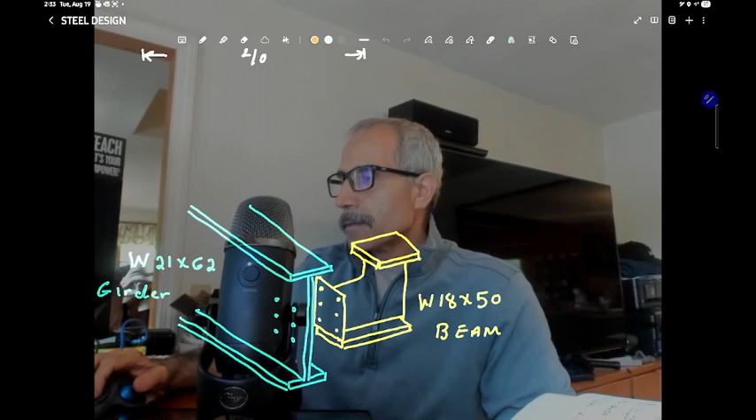In this lecture, we're going to design a connection between beam and girder. There are several different types of connections between beam and girder. We talked about double angle before. This time we're going to talk about end plate connection. An end plate connection is basically a plate welded to the end of the beam, and then you connect them to the girder.

Let me show you what I have. I've got some material I want to show you.

Let's consider a beam to a girder connection. When we connect a beam to a girder, we want the flange of the beam to align with the flange of the girder at the same elevation. This alignment creates a gap between the web of the beam and the web of the girder, and you can see the gap right there.

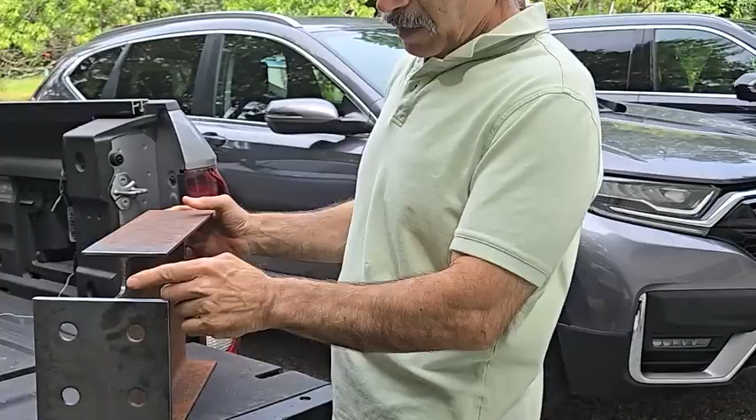To make the connection fit properly, the steel beam should be modified with cuts, typically at the flange and the web. This modification is usually called a coped beam. What I was talking about, this is a coped beam, and it has been coped out right here, notched out right there. This is basically the width of half of the flange of the girder.

So when you bring this in, your end plate right here will touch into the web of the girder. This is the end plate, basically a plate welded to the end of the beam.

When we look at this, I want to show you the end plate first. Let me show you that here. Look at the welding right there. The plate is welded to both sides of the web, and then also welded to both the bottom and top of the flange.

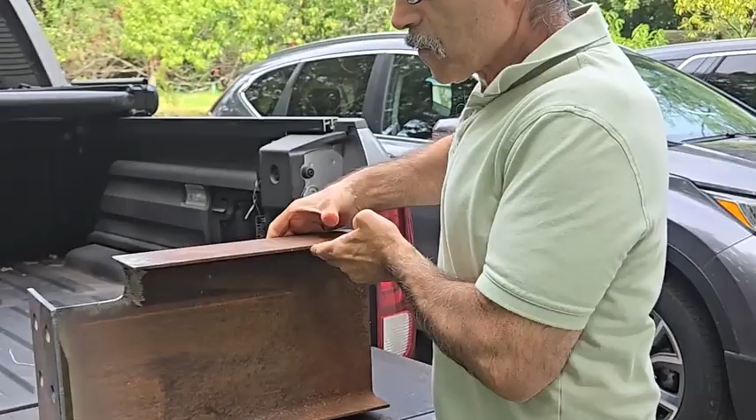When we design this and connect it to a girder, there are 4 or 5 different possible failure modes we have to examine.

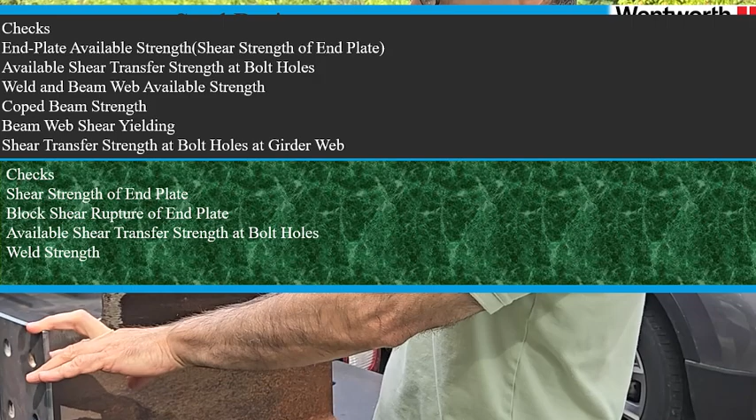Look up on the board and you can see one is to check the available shear in the plate itself, and see if the plate with all the holes in it will hold up under block shear rupture. Then we check the bolt connection, if the bolts are strong enough to connect the shear weight, and then we check the shear capacity of the web itself in this condition.

Then, because we took a notch out of the beam, we've weakened it, so we double check the beam for that weight with the coped beam. Then we check the girder - normally it's bigger and stronger so we don't have to check it as much, but we can also check the girder web and the shear connection between both of them.

Okay, we're going to go ahead and work on this example. This example says: design the available strength of a shear end plate connection to connect a W18 by 50 beam to a W21 by 62 girder web. So this is the drawing I did - we have this W18 by 50 right here connecting to this girder, and it's kind of coped.

Based on these loads, both the girder and the beam have already been designed, so we don't have to worry about that. But looking at the plan view of one of the bays, these green lines are the girder, and your beam is about 40 feet long, with about 10 feet spacing between beams.

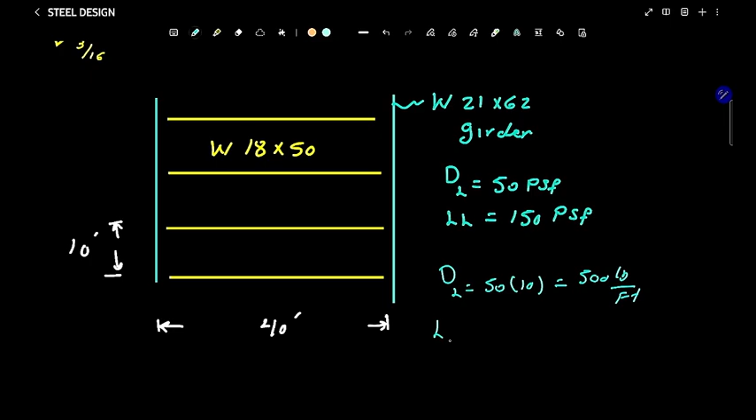First we're going to figure out the dead load and live load per foot. The tributary width is about 10 feet. Therefore, our dead load is 50 times 10, which makes it 500 pound per foot. And the live load is 150 times 10, which gives me 1,500 pound per foot.

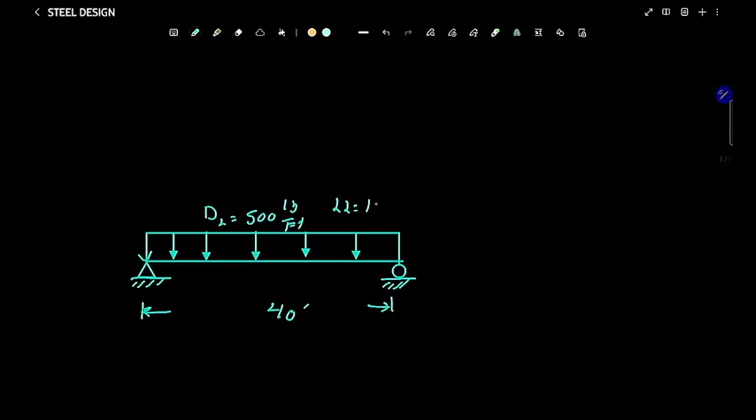So I'm going to come back down here. Dead load is 500 pound per foot, and live load is 1,500 pound per foot. So what I need is the reaction, really I want to know what the shear is.

That's going to be my shear. We do this basically for a shear connection, so this reaction is WL divided by 2. You remember that from kindergarten.

For dead load, it's going to be 500 times 40 divided by 2, and that will give me 10 kips dead load for shear. And live load is the same thing, 1,500 times 40 divided by 2, that's going to be about 30 kips.

So your dead load is going to be 10 kips, and your live load is going to be 30 kips for the shear right here.

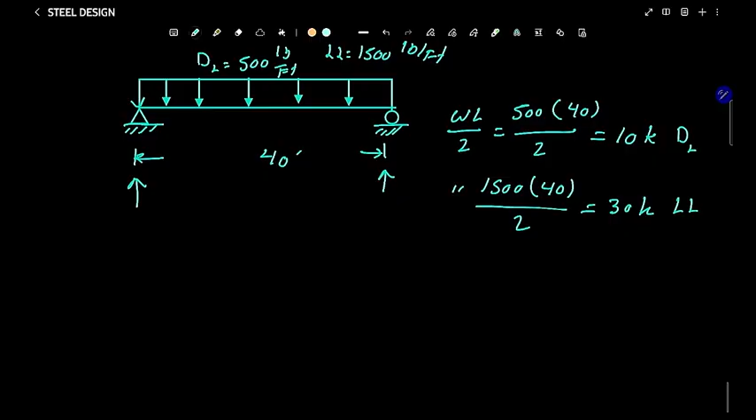To continue with this problem, we're going to use 70 KSI weld and a 50 KSI plate. If you go to the manual, 16th edition, table 2-4, 2-5, we can say Fy is equal 50 for all 3 pieces, and Fu is equal 65 KSI. From table 1-1, the thickness of the beam web is 0.355, and the girder is a little bit bigger, 0.4 inches. Then we're going to go to AISC chapter 2.

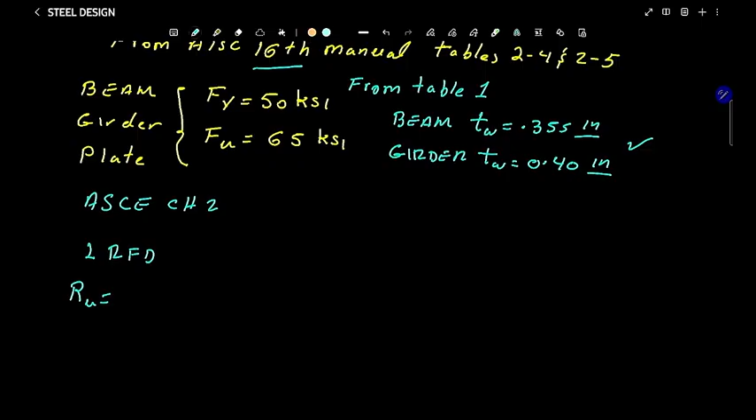You remember that from structural analysis. We're basically going to do a load combination, and for load resistance factor design, our RU is equal 1.2 times 10, that was the dead load, plus 1.6 times the live load, which came out to be 30 kips. And that gave me about 60 kip.

Now if I do the allowable stress design, which I kind of like, ASD, that's basically going to add both of them. We're going to call it RA is equal 10 plus 30, which is equal 40 kips.

If you're a young designer, new at this stuff, I really recommend watching some of my videos about allowable stress design versus load resistance factor design. They're two different design methods. One is the older generation, this one is the new one. Over the years they modified things based on probability, and this used to be the older way when the structure was built very strong and oversized. There's a different theory about it, but I'm not going to get into it.

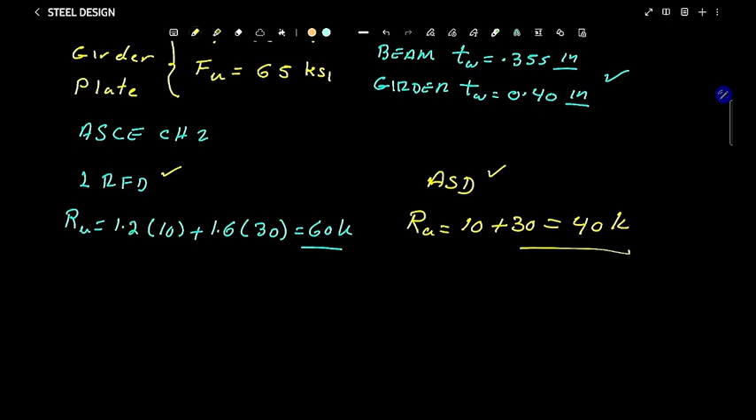So anyway, the first thing we're going to go ahead and do is check the end plate available strength. Let's talk about end plate.

We're going to cover a whole couple of lectures on this. Let me bring this up on a screen a little bit. There's a variety of different formats of end plate. You can see these are basically made for a moment connection, but our end plate is for a shear connection. But never mind.

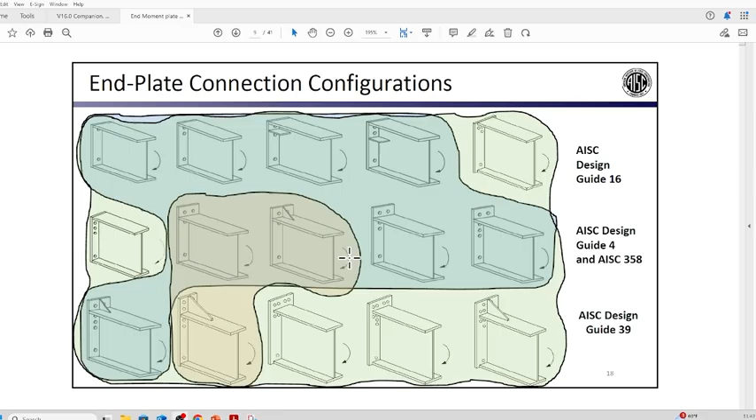One thing I want to tell you is there's a whole chapter, a whole book on this. Let me bring it over here, you can see that now. If you go onto the AISC website under education, they've got a lot of good stuff. Once you become a member, you can download a lot of nice material for free, and I highly recommend it. Design Guide 39, End Plate Moment Connection. There's a whole book on this, and it's really very good reading and useful.

Anyway, let's get back to our problem. We're going to go ahead and figure out the end plate available strength using table 10.4a. Let me show you this, see if I can do this. AISC Manual 16th edition, and then we're going to come into the table.

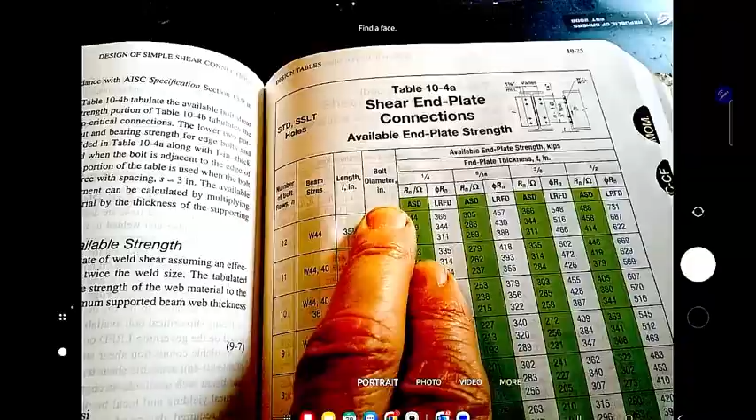If you look at this table, table 10.4a, it's for shear end plate connection, and it's available end plate strength. Just look at the column heading. You got number of bolts in a row, beam size, length, bolt diameter, and then we have the end plate thickness. Our plate is 1/4 inch.

Our bolt diameter is 3/4 inch, and we had 3 rows. So I'm going to come in down here, 3. That's way down here, 3, and our beam was W18, if you remember. And then we have 3/4 inch bolt.

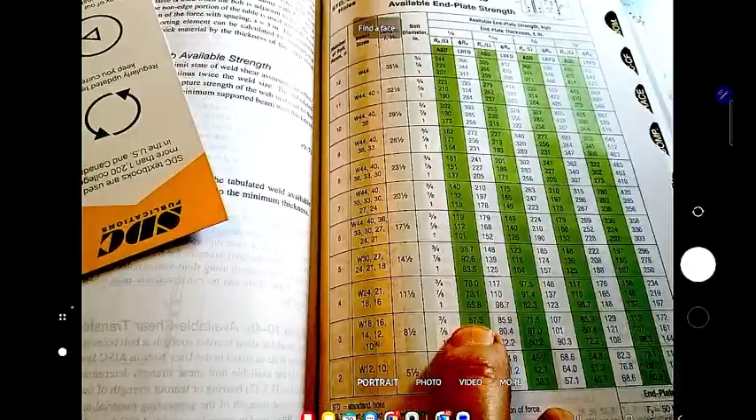And then when we look at these two headings, let's go back up there. One is the ASD, for 1/4 inch is this first one, and the other one is the load resistance factor. Phi times Rn is 85.9. Rn divided by omega is 57.3. So I'm going to transfer those back in my writing. Okay, that's where they come from.

Okay, so we basically said phi times Rn is 85.9, and when we did the load calculation, it became 60 kip, the R right here, and then for allowable stress became 40, so 57.3 over 40. Both design methods came out okay, so the end plate available strength checks out okay.

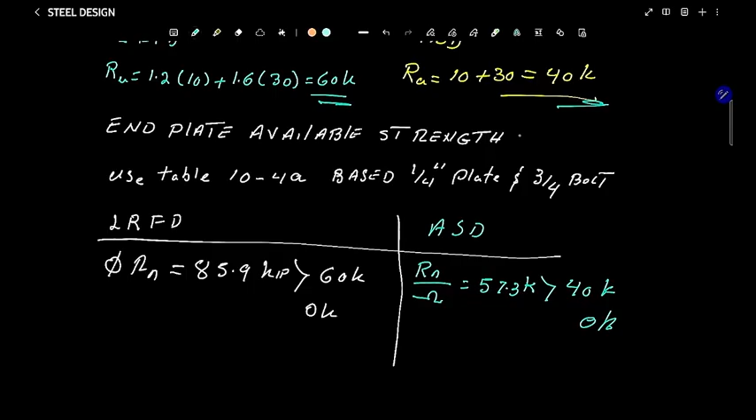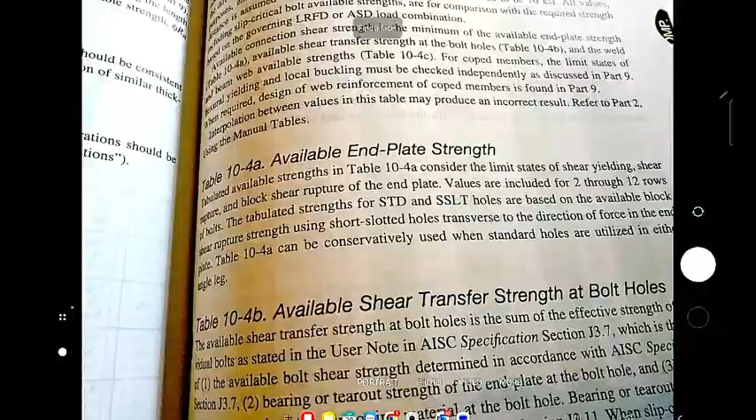Well, we just figured it out from table 10.4a. Make sure you go a couple pages before table 4a and read this section on page 10-23, and come down and read right here, table 10.4a, available end plate strength. It says, read that yourself, and there's a lot of good things in there.

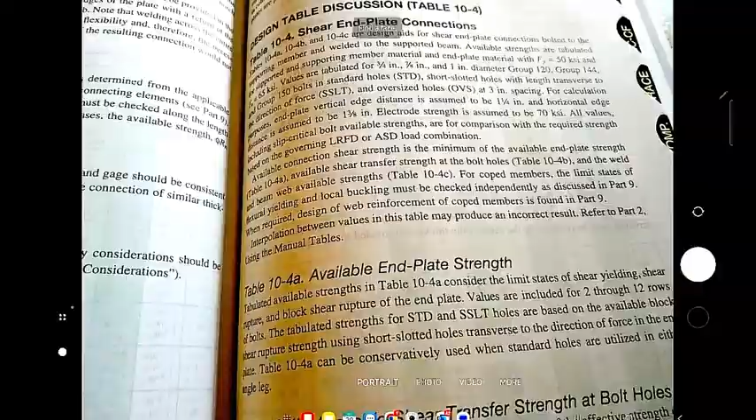It says table 10.4a considers the limit state of the shear yielding, shear rupture, and block shear rupture of the end plate. So they really went through the whole thing. And when you use any table anytime, go ahead and read the description on pages before to give you a better understanding of the table.

So now we're going to go ahead and do available shear transfer strength at the bolt holes. Now the shear transfer strength at the bolt holes is the sum of the effective strength of the individual bolts. We're going to look at the specification J3.7 and J3.11. Once we know that specification a little bit, then we can move on to table 10.4b and 10.1b. Let me write this down so you can have it.

Okay, so now, once you read section J3.7, J3.11, I'll show you in a minute. We're gonna go to table 10.4b, and we're gonna look at the available bolt shear strength per bolt for 3/4 inch group 120 with thread not excluded from the shear plane, and also the thread condition is N.

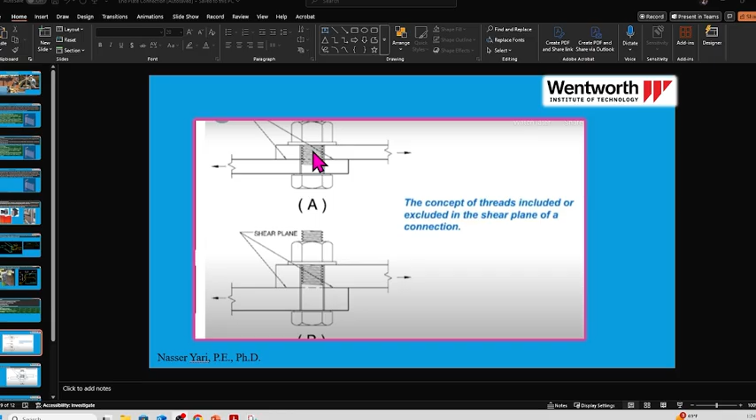Let me show you something in my PowerPoint for a second before we move on there. Right here, this is the shear plane right there, and there's a thread that is excluded, and there's a thread that is not included. You can see a thread included, it's in the shear plane. And thread excluded, it's not there. And that's what we're looking at here.

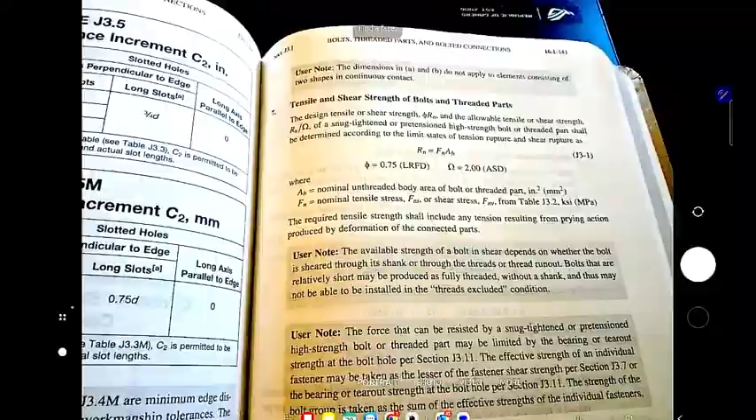So let me close this out and see if I can get the camera going here. You kind of come in and read this section on J3.7 when it talks about tensile strength of bolt, and thread part, and then go to the page and read the 11, bearing and tear out strength at the bolt hole.

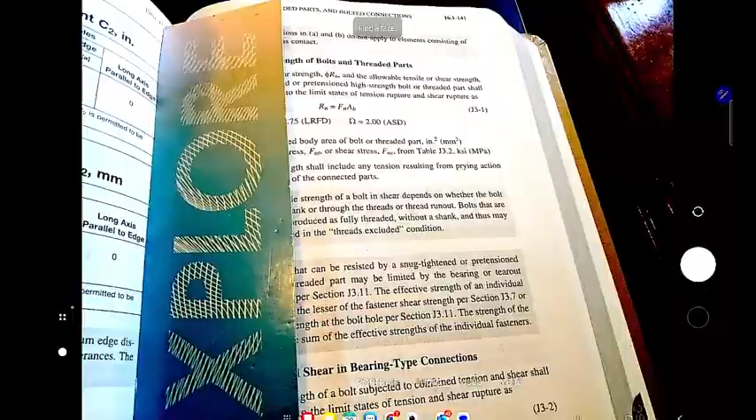And once you understand that a little bit, it'll give you an idea, we can go to table 10.4b. 10.4b is right here, let me get this right. And take a look at the table, understand it. It's a shear end plate connection.

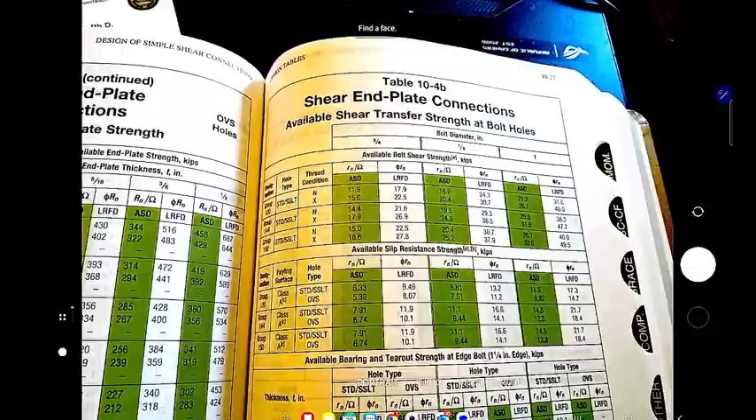At the top you have 3/4 inch bolt, 7/8, and 1 inch. And then the first row is going to be available bolt shear strength. The second part will be available slip resistance. And finally, available tear out at the edge bolt. And then you have one more, available bearing and tear out. We're going to look at this.

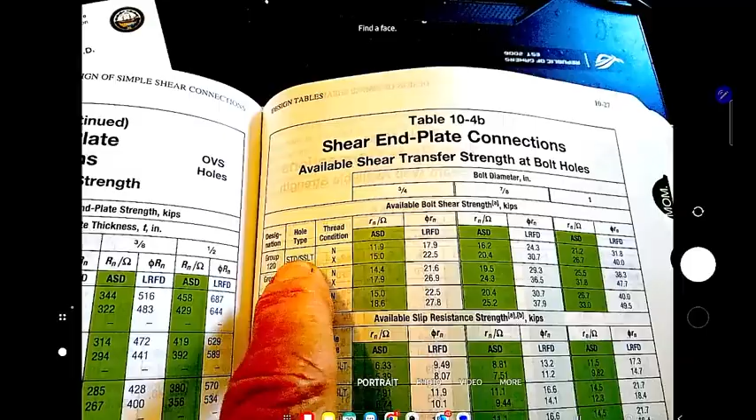So first we're going to go ahead and look at this one right here, and ours is going to be N and excluded, thread condition N, bolt hole, and design group is 120, and there's the N and there's the excluded, not excluded, so we're going to use N, that's why. And then we're going to go to ASD. It's going to be 11.9 kips, and for load resistance factor it's going to be 17.9. Let me go back to the writing.

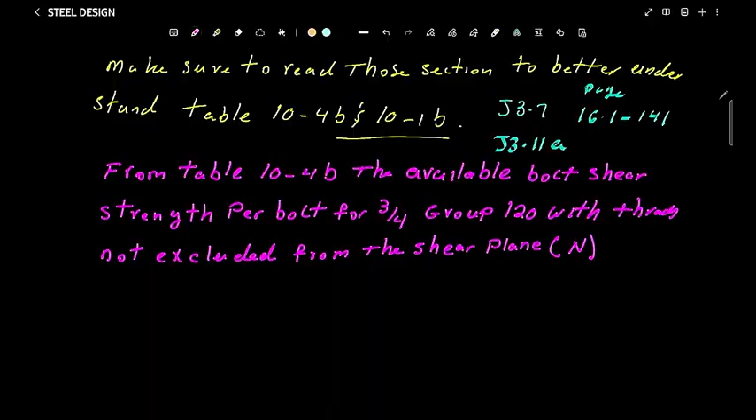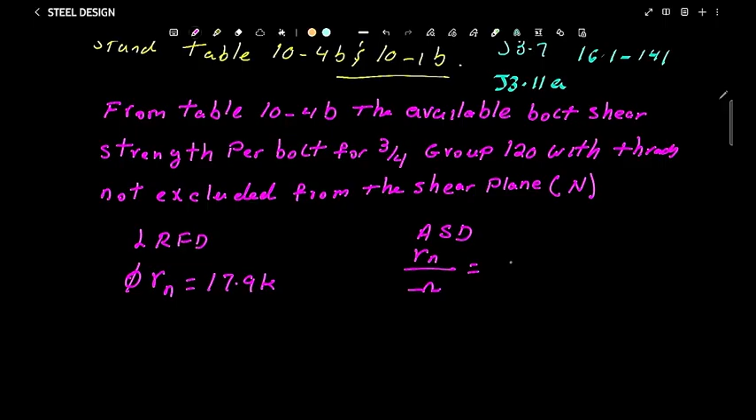Okay, so now we have that. We're going to say load resistant factor design, phi times Rn, came out to be 17.9 kips, and allowable stress design, Rn divided by omega, came out to be 11.9 kips.

Okay, so the next one we're going to do is the available bearing and tear out strength of the 1/4 inch plate for a 3/4 inch bolt. Remember, we're going to use the same table 10.4b. Let me write this down. 10.4b. Some designers will use table

10.1b. Be careful. If you use this, make sure you multiply by 1/4 inch, which is the thickness of your plate, and you should get the same answer. But we can do both. Let's go this way first and go back to this table right here, and I will show you. Let me get the camera going.

So we're going back to this table again right here. Table 10.4b. If you look at the tab, it's available bolt shear strength. We did that, and available slip resistant. We're going to come down and look at the available bearing and tear out strength at the bolt, which is right here.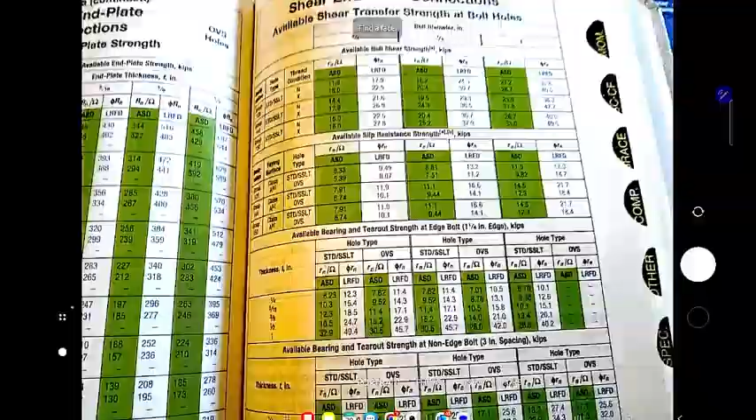Let me get for 1/4 inch. We're going to have ASD going to be 8.23, and load resistance factor is going to be 12.3.

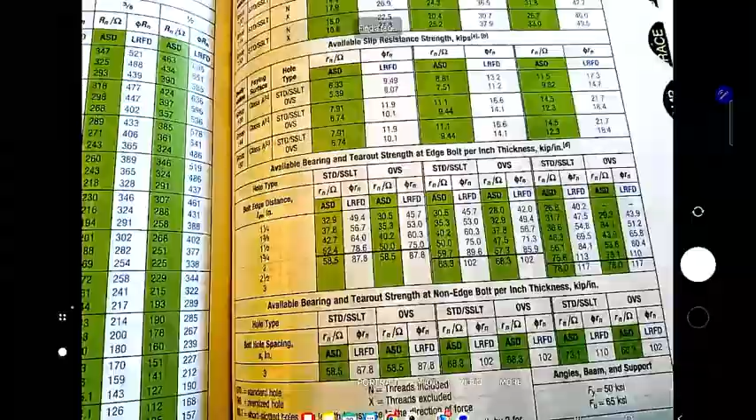Now, if you use table 10-1b, this table right here, if you use this table, it'd be tear out right there. What was that number I'm looking for? It'll be right here. You're going to use the edge distance of 1.25 inches.

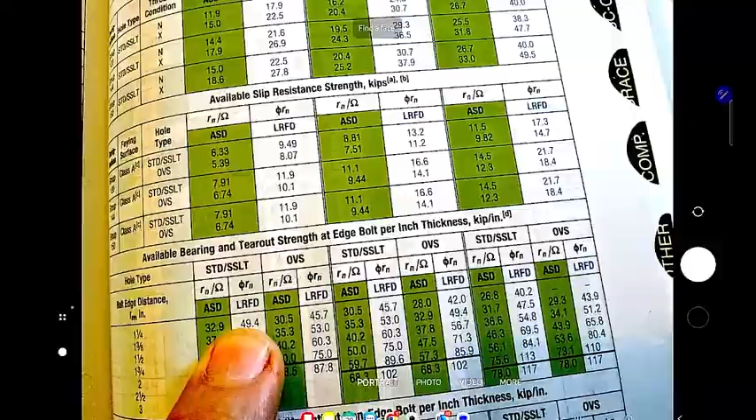Then you have to use these numbers, but remember this doesn't have a thickness, so you're going to multiply 49.4 times 1/4 inch, 32.9 per 1/4 inch. We end up with the same number as the other table, which was right here. We end up with this one right here. So if we use table 10.4b, this is what we get. However, if we use, let me change color, use

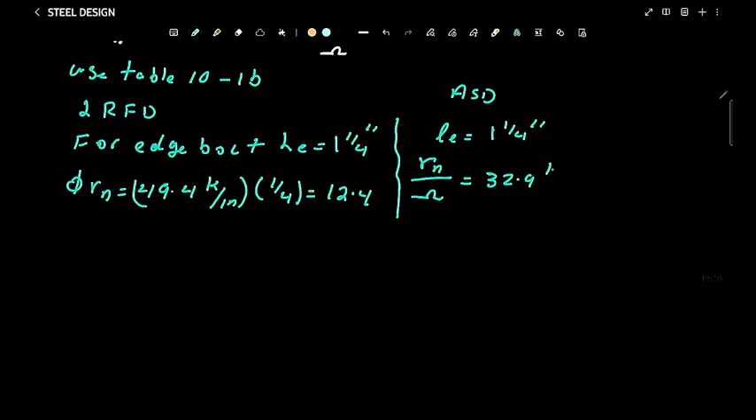Okay, so if we continue with table 10.1b, we can go for a non-edge bolt with the spacing equal 3 inches. Our phi times Rn becomes 22 kips, and our Rn divided by omega becomes 14.6. Now, if we go to table, let me change color so you believe me.

If you go to table 10.4b, we will get the same exact result. We get 22 and we get 14.6. Let me just go to the table, show you, change the camera.

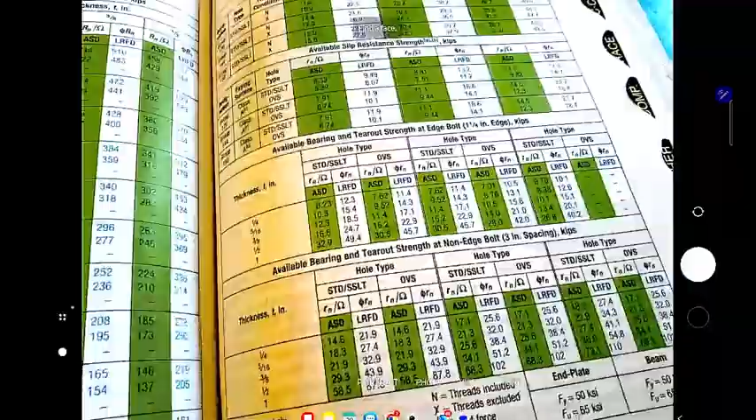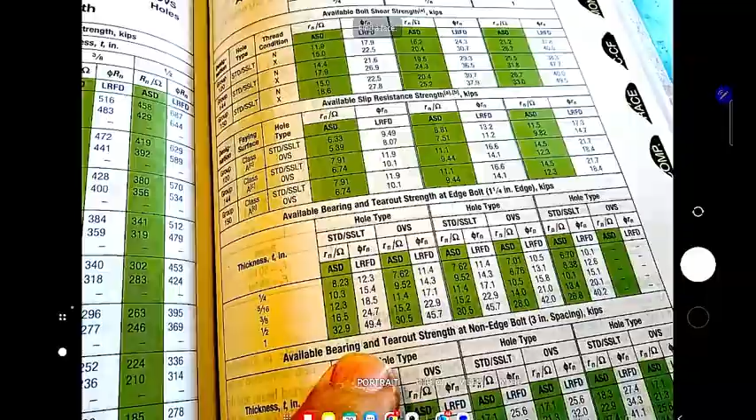Okay, this is again table 10.4b. If you come all the way down to the bottom, you can see here it's 1/4 inch, 14.6 and 21.9, and that's what we had before. So basically, when we went to table 10-4b, you can go through all these individual available slip resistance. I think ours was not a non-slip resistant. And then we have available bearing and tear out. Then we look at the available bearing and tear out, the non-edge, all that.

So let me show you something in a PowerPoint here. Right here, the plate, which is this plate right here, is 1/4 inch thick. And this plate right here is 1/4 inch thick. It'd be connecting to the girder. The girder plate right here, the web plate is

0.4. So 0.4 is a lot bigger than 0.25. So we're going to say the plate will control. That means if it's going to fail, it'll fail at the plate, not at the girder, because this is the weaker of the two. So we're going to say the plate's going to control. And let me close this out.

And now we're going to go ahead and explore and find out what is the minimum transfer strength, minimum available bolt shear strength, which is multiplied by 2. So if I look at the plate right here, I got 2 holes at the bottom right here, 2 holes in the middle, and 2 holes at the top. So we got to look at the strength of each individual of these and then take it from there. So let's continue with that.

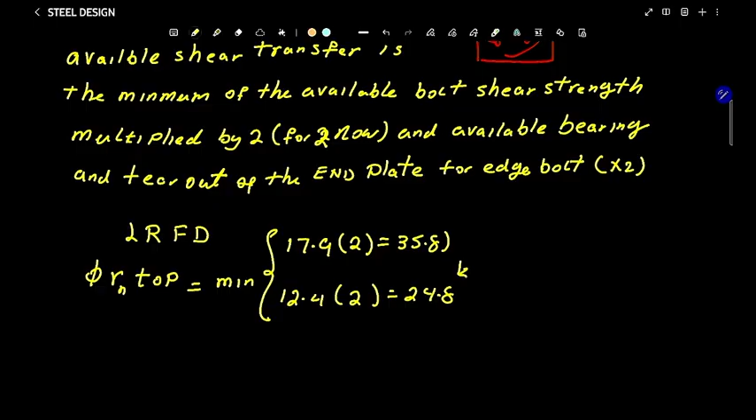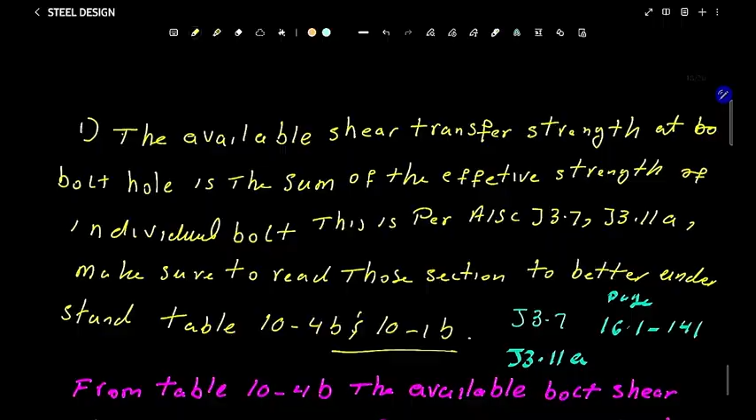Okay, so here it is. The minimum of the available bolt shear strength multiplied by 2 rows, because we have 2 rows right here, one here, one here, so we multiply by 2 rows, and then we're gonna use numbers we already calculated from table 10.4b. We did all these numbers, so we're gonna use those for the top, middle, and bottom. This one was just for the top part, so basically we're doing it for this group right here.

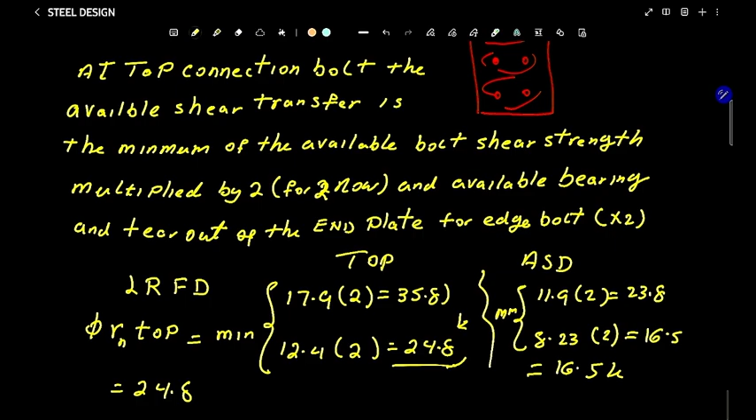And controlling is 24.8 kips for load resistance factor design, and 16.5 for allowable stress design. Either one of these is fine, we can just go ahead and do load resistance factor design. In this example I show both methods, so you have both for your knowledge and information.

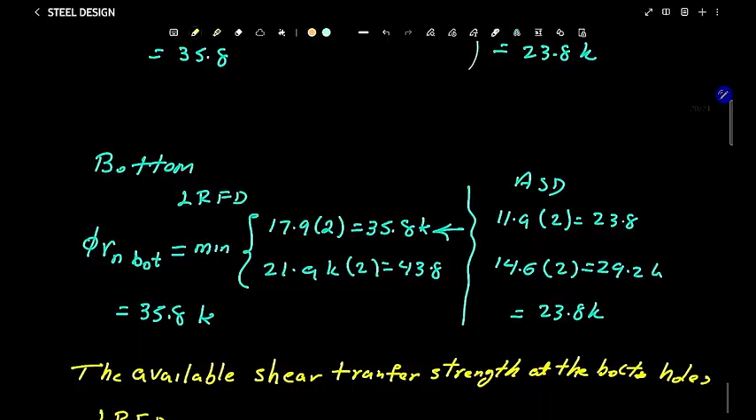I'm going to go ahead and continue with the middle and bottom. I'm just going to write it down. Okay, I wrote this down so I can save time. We did each individual, and we came out with the top, bottom, and middle. And now we're going to take the entire thing.

We're going to say the available shear strength transfer at the bolt hole for load resistance factor design is going to be phi times rn on the top plus the middle plus the bottom. For the middle we have n minus 2. But if you had a situation with multiple rows, like 1, 2, 3, 4, where's the middle? That's where this equation comes in handy.

But in here, since we have only 3 rows, our middle is our middle, and it comes out to be 96.4 kips, which is bigger than our 60 kip that we calculated. And if I do the same thing in allowable stress design, it comes out to 64.1, which is bigger than the shear load from the loading of 40 kip. So this is going to pass, no problem. That means our plate is strong enough, it's not going to fail.

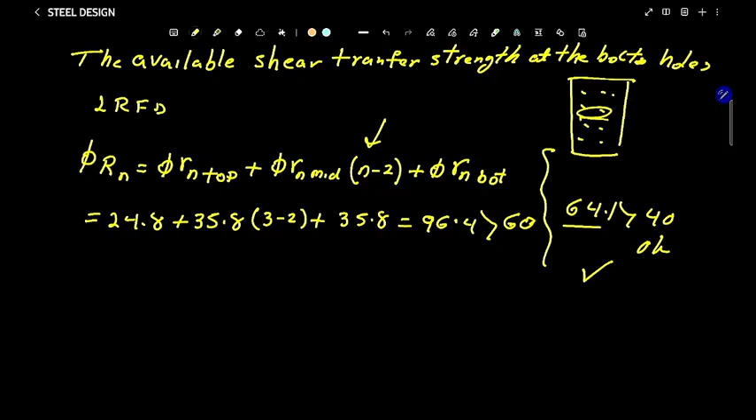So now let me go back to the PowerPoint, I'll show you something here. We basically said, okay, we want to check the plate. We did check the plate. We checked the shear of the plate, it was good. We checked the bolt connection, it was good.

So the next thing we're going to check is the weld, these welds right here. Find out if the weld is strong enough, because when this is connecting to the girder, is it going to fail from the weld, or is it going to fail because of the plate, or the beam, or the web? So we're going to check the weld right now. That's what we're going to do next.

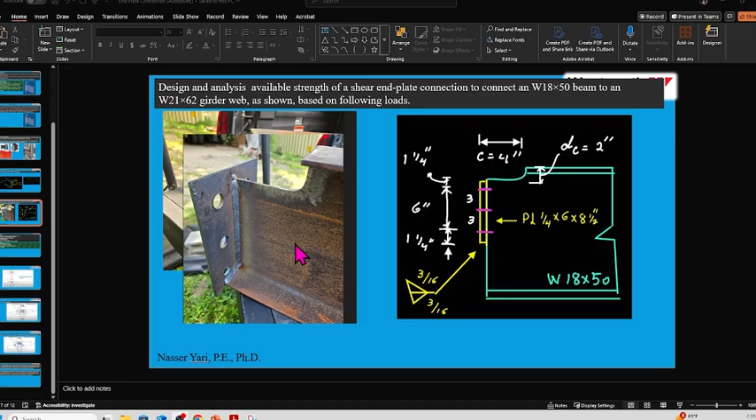Okay, we're going to check the weld section, and we say we're using 3/16 weld. You're the designer, you can change this if you want. And go into table 10.4c. The code says—I'll show you in a minute—our beam has a tw of 0.355, but let's look at the table, I'll explain what I have here.

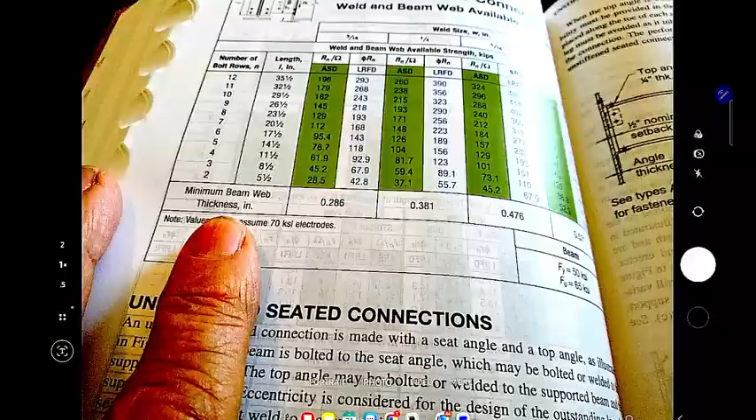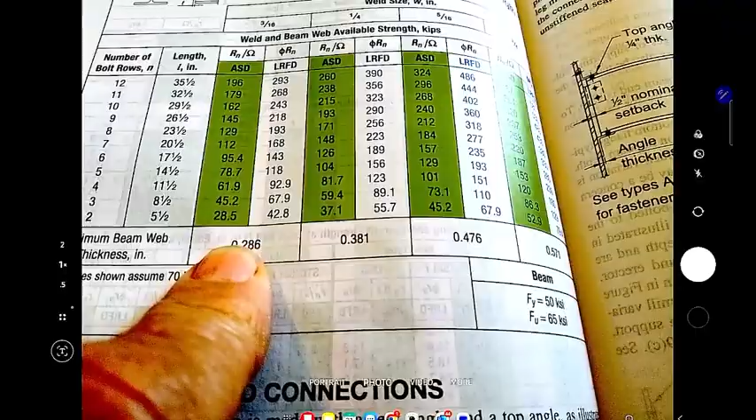Okay, so here's table 10.4c. Look down here, right down here: minimum beam web thickness is 0.286, and we're gonna use this row, which is the weld we're gonna use, 3/16, not 1/4, 3/16. So if we come back down here, it says the thickness of your web has to be at least 0.286, but ours, the beam, is 0.355. So we're going to use that, and then look at the number of rows, which is 3 right here.

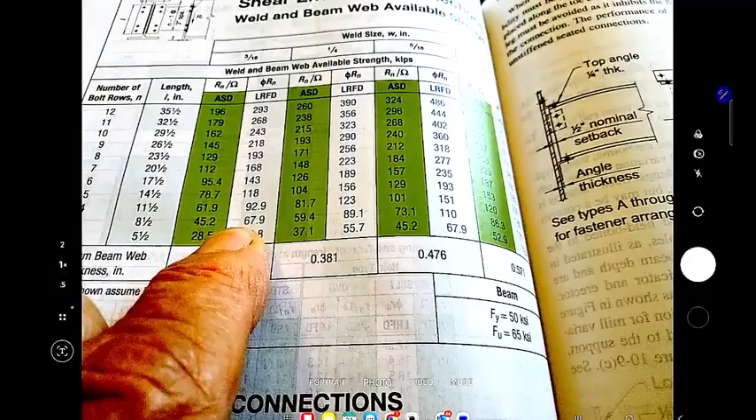Number of rows is 3, and then we're going to come across, length is 8.5. We're going to come across right there for load resistance factor design at 67.9, for allowable stress design 45.2. Let's take that back into our writing here.

So we're going to come back with those numbers we just had, say load resistance factor design, it was phi times Rn equal 67.9 kip, just barely bigger than 60. And allowable stress design is Rn divided by omega, and that equals 45.2, which is bigger than 40.

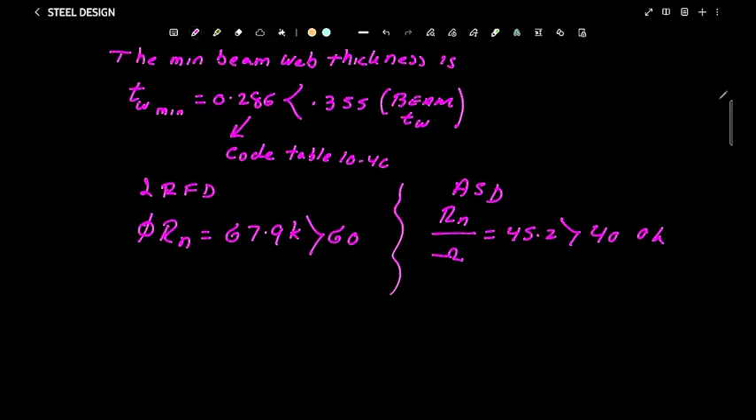It's okay, that's why I like to check both of them, see how close we come to it. This is pretty close, I don't like it. And that's at 3/16. This is acceptable, but if I had to design this, I'd probably go to 1/4. I cannot go to 1/4 because I don't have the minimum thickness. So I had to do this. Okay, so let's say it's okay.

Alright, so we're going to go ahead and do the cope beam strength, and let me go to the PowerPoint first.

We're going to go to the manual part 9, has all this explained, but in order for us to check the web strength of the cope beam, we got to look at the lesser of these: limit state of flexural local web buckling, shear yielding, shear rupture, block shear rupture, and the effective strength of the individual fastener, which we have done some of that anyway.

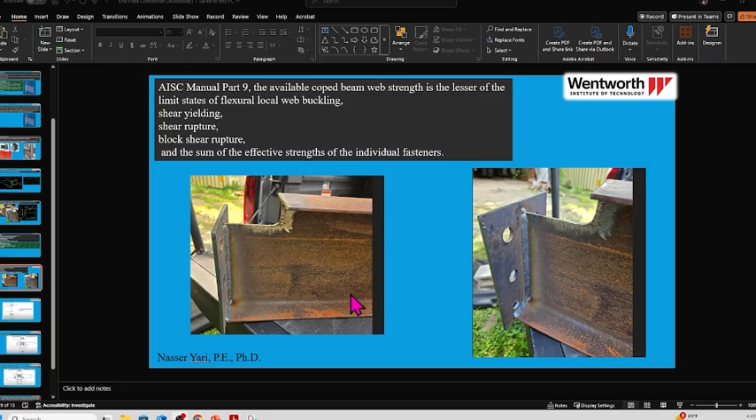So let's go to section 9, see if I can bring the camera up. Okay, section 9, there's a cope beam strength, and let me go to the next page.

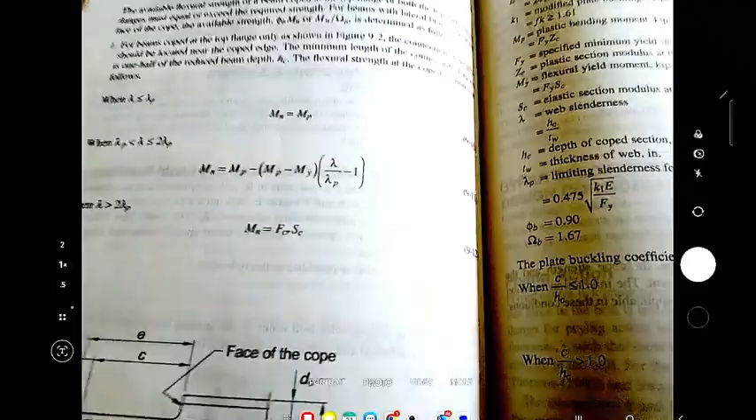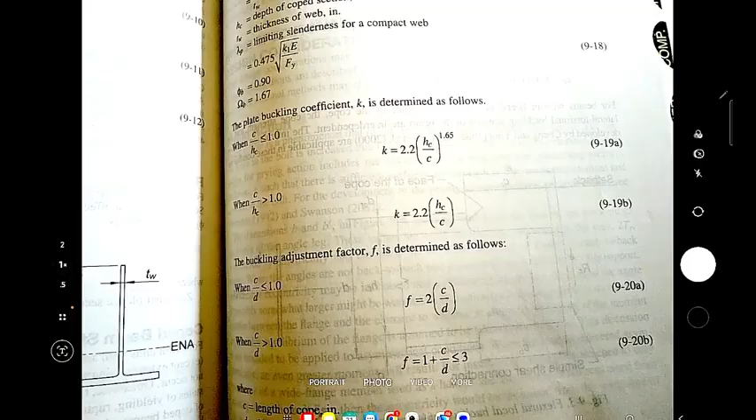As you can see, we gotta get some of these dimensions. We already have all this dimension ourselves. We gotta find, we know C, we know DC. We gotta find E, and then we're gonna come back in here, follow the procedure in this chapter, come back down here, and we're gonna find out whether HC divided by C is less than 1 or bigger than 1, or C divided by D is less than 1 or bigger than 1, and which equation we're going to use, 9-20A or 9-20B. So we're going to follow this procedure in this page.

Let's go back to the writing. Okay, so what we have here, if you go back to the PowerPoint for a second, we already have these dimensions. We know the DC is 2 inches, C is equal 4 inches, and we're going to give it a setback of about 1/2 inch for connection right there.

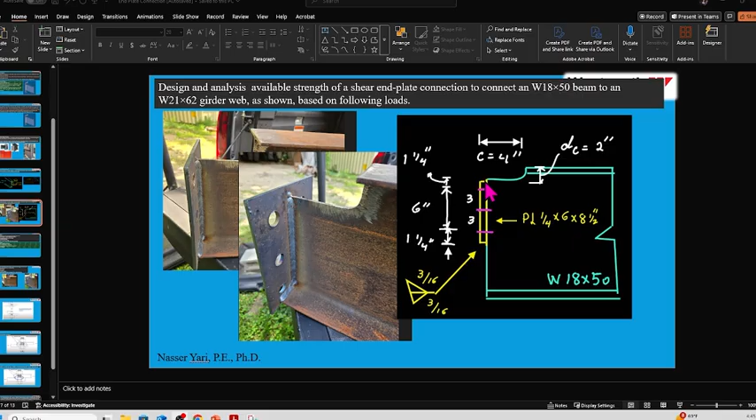So what I have right here is we got all this information right here. Our E comes out to 4.5, and then the ratio HC, which is D minus DC, came out to 16 inches, and C divided by D comes out to 0.22, and C divided by HC comes out to 0.25, and I showed you in section 9 of the manual.

Because of those, we're going to go ahead and see which equation we're going to use. So C over D, it was less than or equal 1, and ours is, yes, it's 0.22. Therefore we're going to use this equation.

F is equal 2 times... I did that wrong, hold on. F is equal 2 times C divided by D, and this is equation 9-20A, which is equal 2 times 0.22, and that's equal 0.444. That's equation 9-20A of the manual.

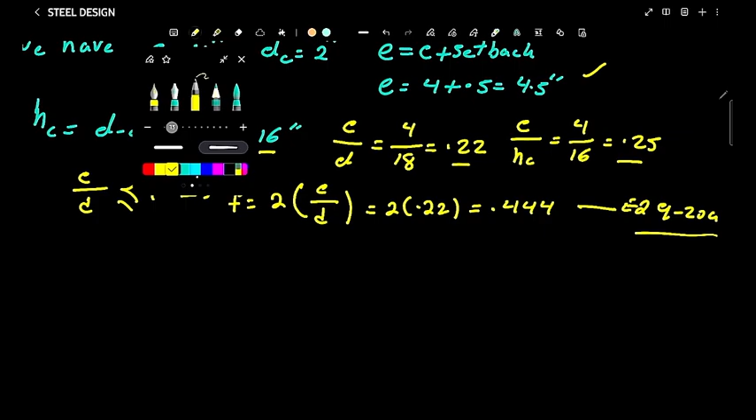And since also C divided by HC is less than 1, then we're going to use equation 9-19A, and that will give us basically K is equal 2.2 times HC divided by C to the power 1.65. So that comes out to be 2.2 times 16 divided by 4 to the power 1.65. So K comes out to be equal...

21.7. We're going to continue and go calculate K1. This is based on the manual. Equal F times K. If that's bigger than 1.61, this is equation 9-14.

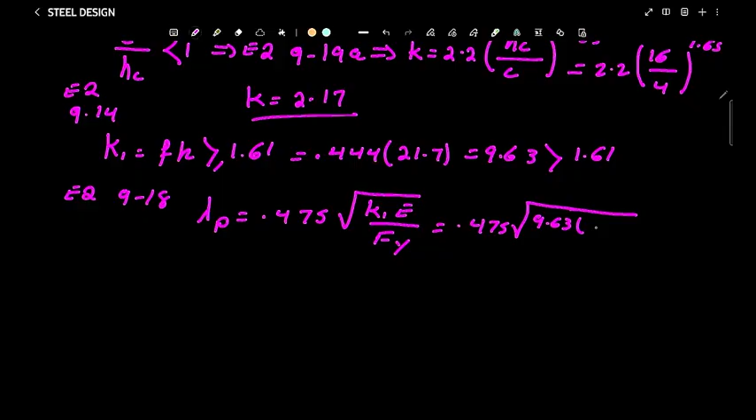E is at 29,000 KSI, we know all that for steel. Divide that by 50 KSI. So lambda P comes out to be 35.5.

And 2 lambda P, which would be 2 of that, it's going to be 71. I lied. Yeah, 71.

And if we look at in this situation, let me switch back a little bit here. We have lambda P less than lambda less than 2 times lambda P, and if that's the case, we're going to go ahead and use equation 9-11, and the plastic section modulus Z for the cope beam is different. So we're going to say...

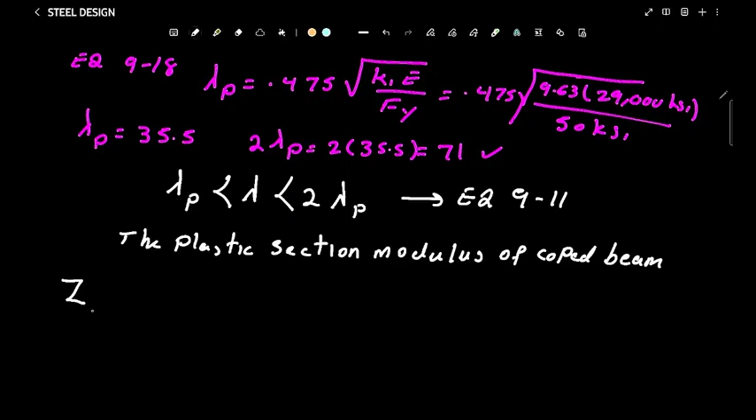Okay, so we're going to go ahead and find this, and this is from the table basically. And let's go to that table, show you that.

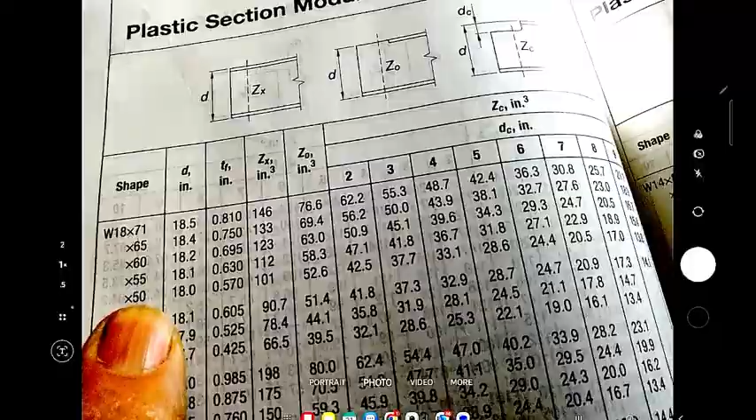Okay, if we go to table 9.2b, look at the table heading. It says shape. Ours is a W, here's my hand, ours is W18 by 50. And when you come back right here, our DC was 2 inches, right? So we're going to come back, and for 50 it's a 42.5. So take a look at this table so you know how you use it. That's a 42.5.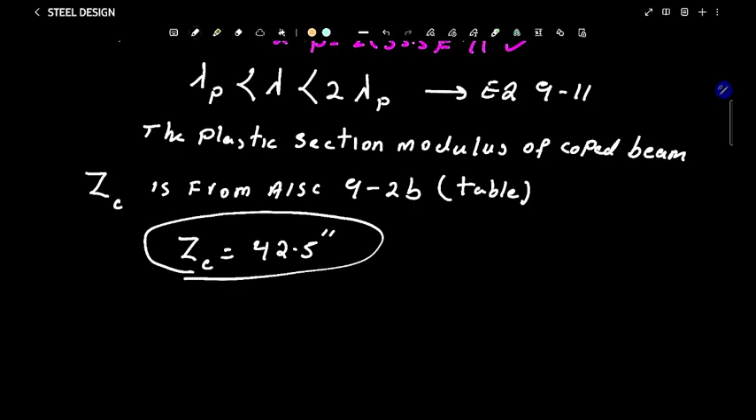So that's where we got the 42.5. Now once we have Z, from steel design 1, you learn how to calculate the plastic moment: MP equals Fy times Z, C in our case, and that was 50 KSI times 42.5, which gives us 2,130 kip-inch.

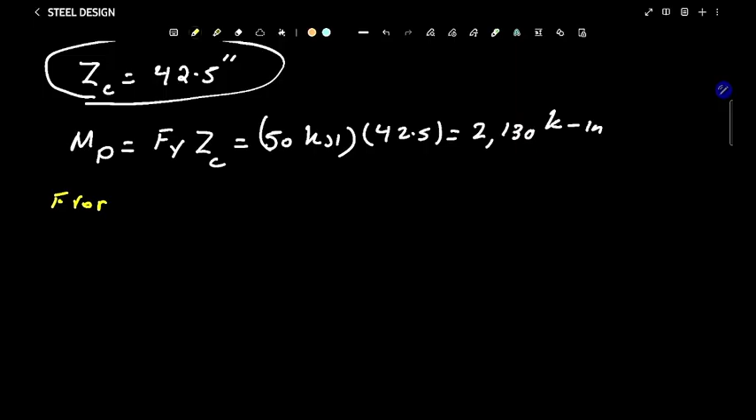So let's switch to table 9-2A. Same way, we're going to find section modulus SC, which comes out to 23.4 inch. Then MY comes out to be Fy times SC, that's 50 times 23.4, equal to 1,170 kip-inch. You want to know the difference between plastic section modulus and elastic section modulus Sx?

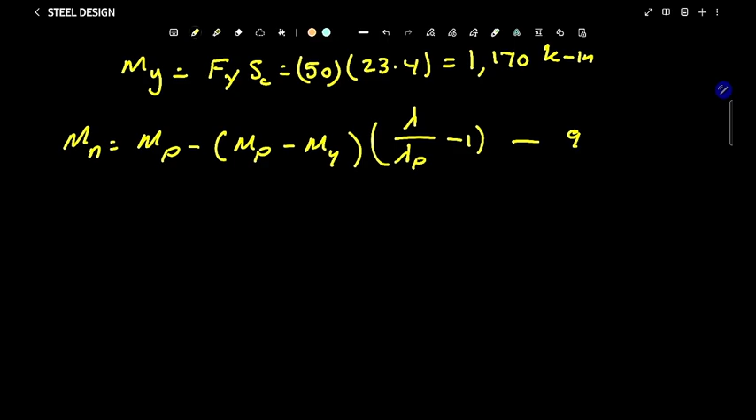So that's going to be basically equal to 2130 minus, 2130 minus 1170, times 45.1 divided by 35.5 minus 1, and that comes out to be 1,870 kip-inch.

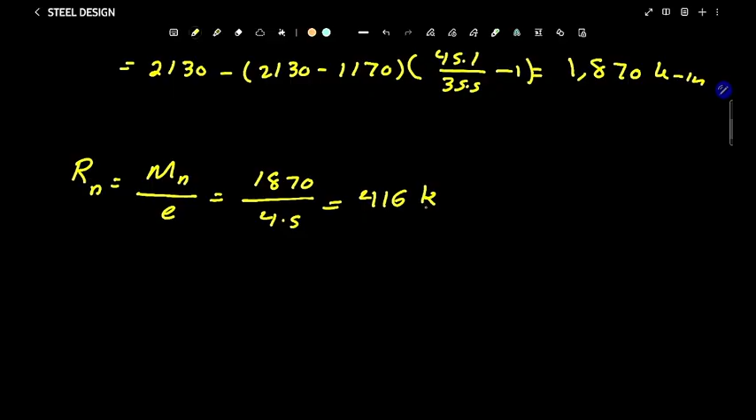So our Rn is equal to MN divided by E, and MN was 1870, E was 4.5. You see that comes out to 416 kip. Now we have that, we can go ahead and find out if it's going to make it or not.

So if I go to load resistance factor design, phi is equal to 0.9, and phi times Rn is equal to 0.9 times 416, and that's equal to 374 kip, which is bigger than our 60 kip.

And if I use allowable stress design, omega for beam is 1.67. Rn divided by omega, that's 416 divided by 1.67, which gives us 249, bigger than 40. So the beam is way strong, no problem there—I mean, that's the web.

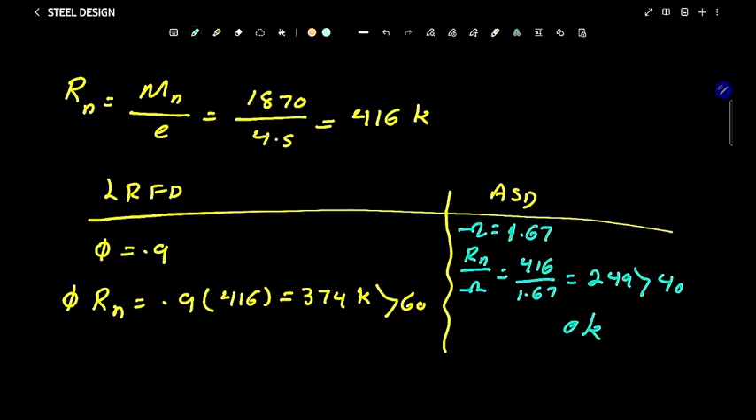Next, we're going to check the shear strength.

Alright, so next we're going to go ahead and check the shear strength of the beam web, and we're going to go to section J4.2a. Let me bring that up—I already have it open, and that is right here. That's a good section you should really read.

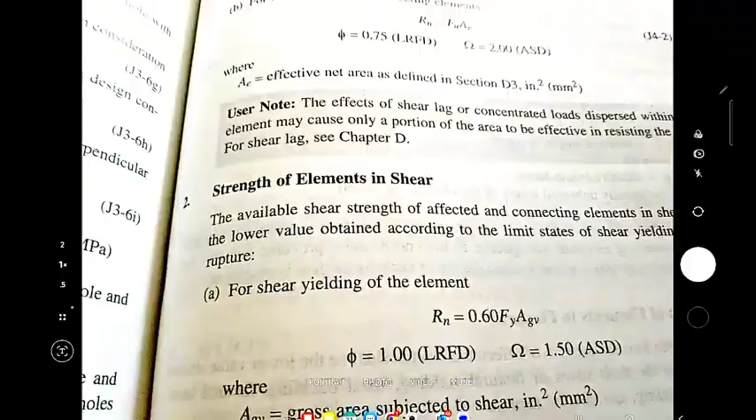There's the shear strength, section J4.2, and it checks the strength of the element in shear. If you go to the next page and continue looking at that, you can see block shear and a lot of good reading here. Please read these so you know what we did here.

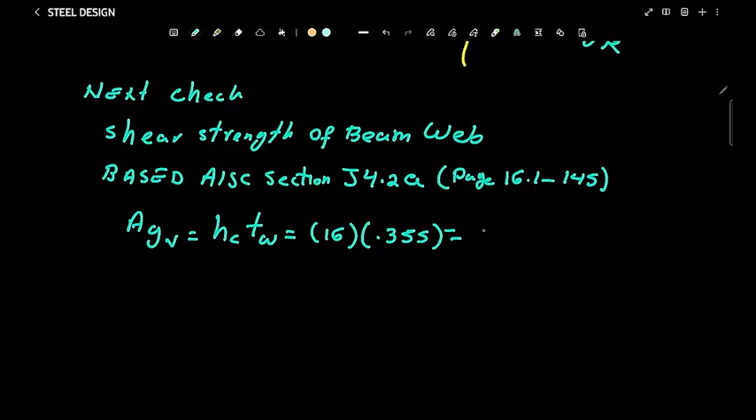Okay, from there we're going to have the shear gross cross-sectional area, AGV. That is basically HC times TW, which is equal—we had 16 inch because we took 2 inches out of it, remember?—times 0.355, and that will give us 5.68 inch squared.

And then we have Rn comes out to be 0.6 Fy AGV, which is basically 0.6 times 50 times 5.68, and that will give us 170 kip.

Now we have this, we can go ahead and figure it out in both designs. Load resistance factor design, our phi is equal to 1, and allowable stress design, omega is 1.5. So phi times Rn is equal to basically 170 kip, and that is bigger than 60, pass with flying colors. And this one will be Rn divided by omega, which is 170 divided by 1.5, and that'll give us 113, bigger than 40 kips.

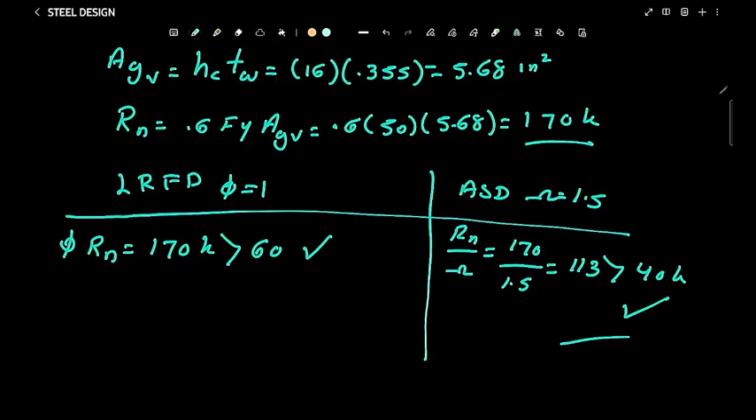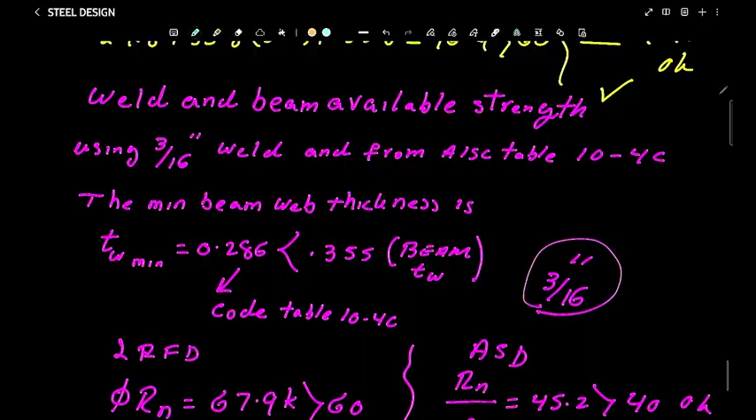So really, if we go back through all the stuff we just went through, and if you look at your notes, the one that controlled the available shear strength of the connection is the weld of the beam. Remember we did the welding, I said oh, that's too close. Let me see if I can find it—the weld, where are you? We came back to here, we said the weld was the one that had the closest margin, which I was not feel comfortable with. But this is the one that really controlled, because it's the one that's closest and has the smallest margin. But otherwise, this connection checks out.